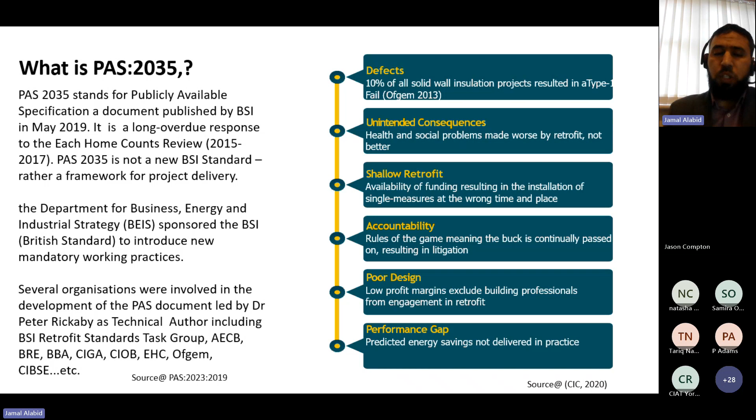And also when it comes to accountability, who is accountable for the unintended consequences and issues caused by retrofitting buildings, and why the design was poor. Is it lack of professionalism? Is it lack of management? So there is a gap, not just in performance, but in understanding the procedure.

So it was really a good idea to get a document that guides people throughout the retrofitting process. I'm trying to define retrofitting as not just renovation or refurbishment, because it's interrelated. These terminologies - renovation, restoration, refurbishment - but the one that refers to improvement of energy and thermal performance of buildings that leads to reduced carbon emissions, that's what we mean by retrofitting. Refurbishment can be just an aesthetical aspect - changing the color, painting, tiles - but that might not lead to improvement of energy or thermal performance.

Of course, environmental performance is counted here. So that's where we distinguish between retrofitting in this context and renovation, restoration. Restoration is probably quite clear - restoring the heritage of the building.

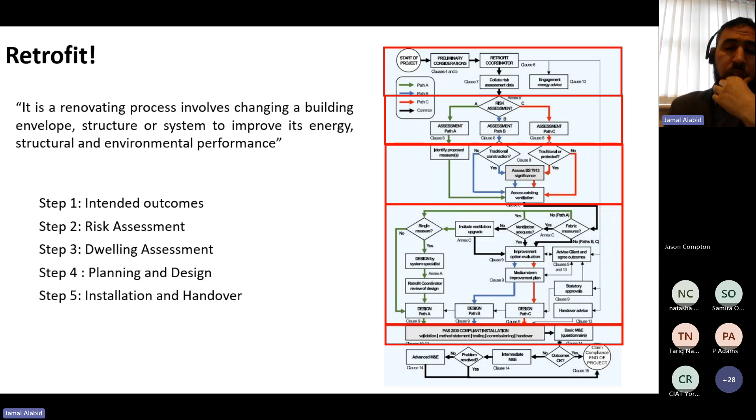That's the same PAS 2035, but a version of 2023. Well, it started last year, but will be released. It really specifies a lot of rules, especially during installation and handover, and also for the retrofit coordinator's intervention and accountability at this stage.

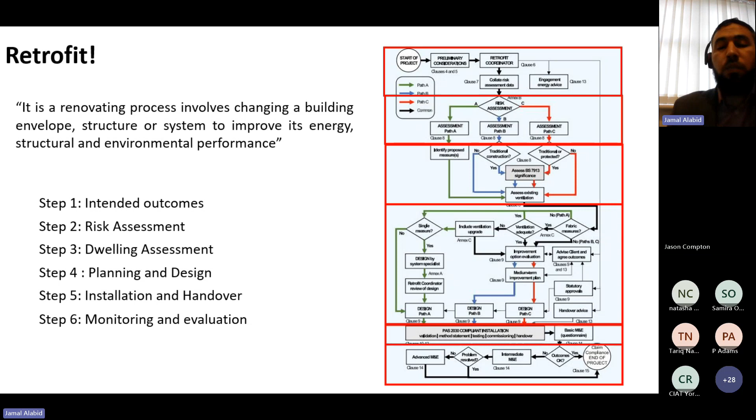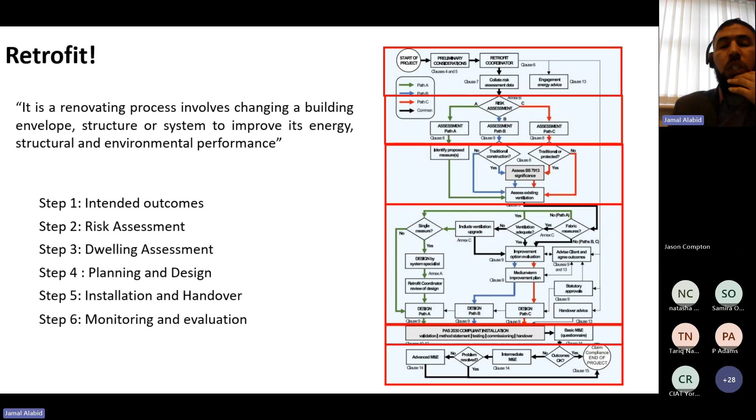This stage, stage 6, is the monitoring and evaluation stage. This will define the time and period the building should be monitored, and who is accountable for this. There are 3 evaluation stages, whether basic or advanced evaluation, and it can go up to 1 year, starting from 3 months to 1 year. Monitoring depends on the certificate produced earlier during installation.

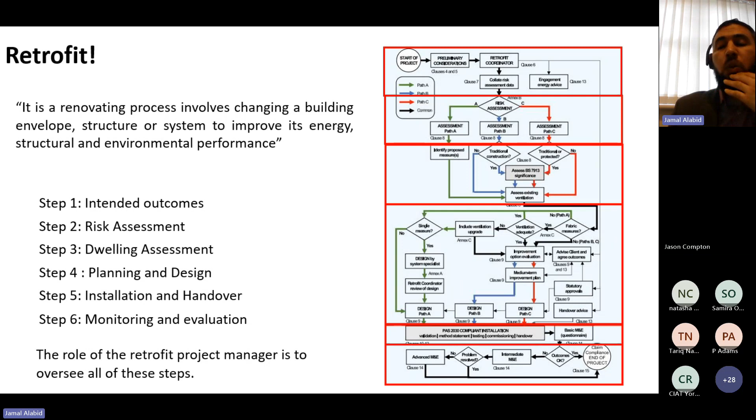So this is probably the final stage, but the retrofit manager or coordinator is the one who needs to look at all these stages and oversee all these steps from A to Z, and the accountability goes to that person. So the new PAS 2035 refers to domestic buildings - a very similar procedure applies for non-domestic buildings, the PAS 2038.

This document defines a few rules within this procedure. It introduced in 2019, including the retrofit advisor, which is a person who has the knowledge to advise on the intended outcomes, understanding the client requirements and the project requirements as well.

There's a limitation and a scope for each project. The retrofit coordinator is a qualified person who has a level 5 diploma in retrofit coordination risk management, and is also registered as a chartered member with bodies like ARB, RICS, CIAT - a few professional bodies that are accepted.

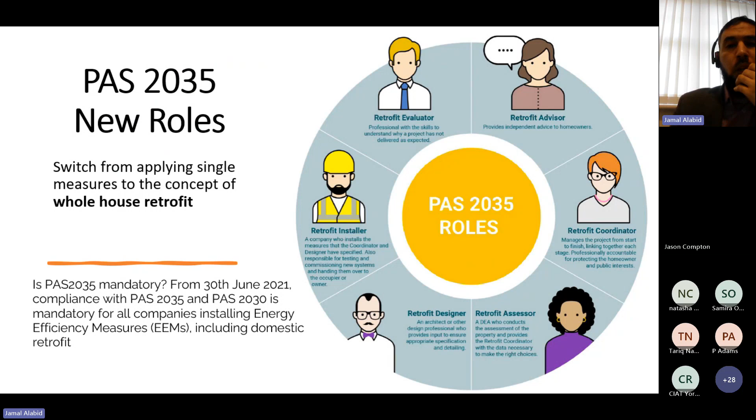Retrofit evaluator comes later in stage 6. It could be the retrofit coordinator, but in some cases it has to be an external retrofit coordinator if the evaluation is an advanced evaluation - it's not allowed for the retrofit coordinator appointed for that project to go for that stage.

This is the rule defined earlier, describing what the person is qualified to do within that process, and the qualification required. If we look at retrofit assessor, for example, someone has a qualification of that level 5 diploma in retrofit coordination.

That would be enough for Path A, risk Path A. But for domestic energy assessor, for Path B and C, they also have to have this level 3 qualification for traditional buildings, the one I referred to earlier, and be registered with an accredited professional body like Elmhurst, Stroma, and a few more - not only these two accredited bodies.

Coordinator again needs someone who has the level 5 diploma as well, but also has experience in the profession, including these rules, and is registered as a qualified member and registered with Trustmark schemes.

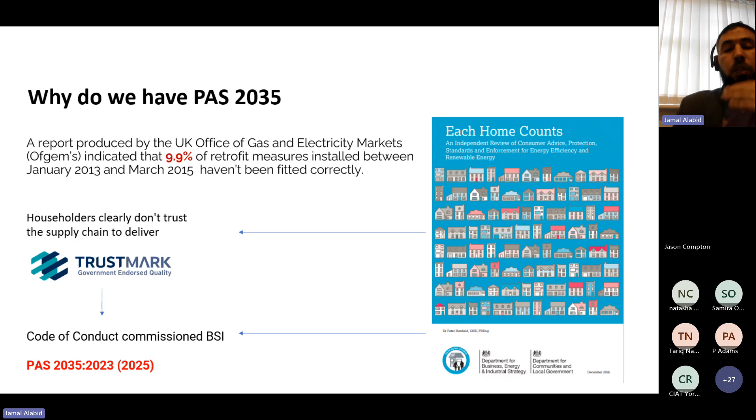Looking at the Preston case specifically, I'm putting a link with these slides about that social housing project and what went wrong exactly. Kate de Selincourt, if I still remember, was the one in charge of this project.

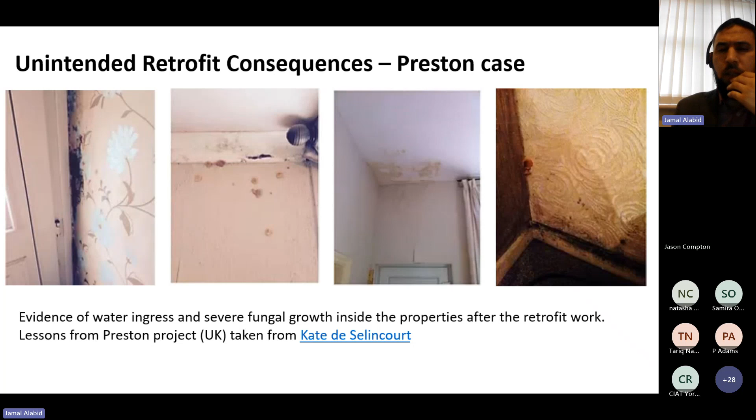So lots of issues. These photos were taken from these houses, and you can see how terrible really the situation is, the mold growth and damp everywhere. And not only that, it led to

just to really retrofit these social housing back. So unintended outcomes can be avoided earlier, not during the design, but during the assessment really, understanding the fabric, and not just the fabric but the way the building is used as well will have a big impact on the health of the building and the occupants, and how many people are using the building,

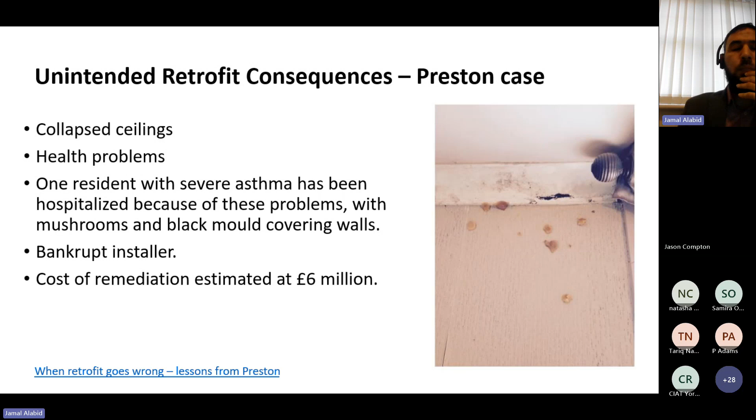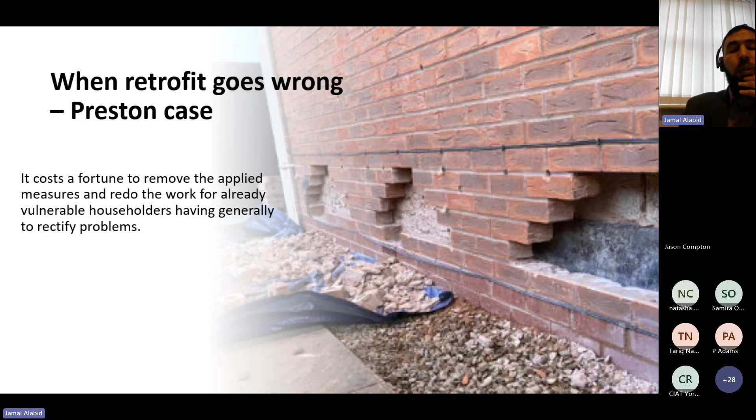and even the type of the building, whether it's social housing, as it has different occupancy patterns. So of course we probably all understand. So the headache and the problem is that if things went wrong, how are you going to get this back? Time consuming, cost, and a lot of disruption as well. So this case study brought really awareness of how retrofitting should be carefully treated and dealt with from the beginning, and understood well from the beginning.

So what are the possible reasons behind this? Not really properly understanding the climate conditions around the building, whether it's heavily exposed to wind or rain, or the conditions around the building. The assessment wasn't really accurate, let's say. The one who did the assessment, clearly a building assessor, energy assessors, but they lack knowledge of older buildings and traditional buildings. So that means them not really understanding the behavior of the fabric,

whether it's breathable or unbreathable, and how to introduce a new material and how that works together. And this is, by the way, when we look at software like WUFI software, it will give you really a good understanding of how materials work together as assembly, and how to avoid especially moisture issues, especially that trapped inside the fabric. Poor design and detailing, and that's of course because of lacking understanding of the building fabric, and

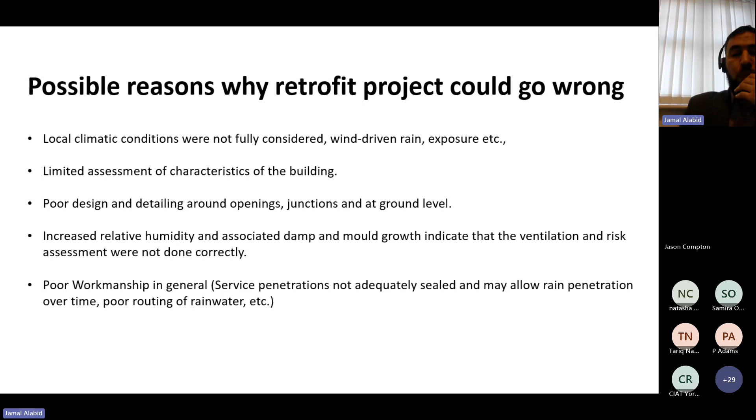Probably installation and workmanship, that during the construction and during the installation of systems maybe was poor, and wasn't adequately sealed and may allow rain penetration. So it could be one of these reasons really. So this is the highest risk, getting your building damp with water content, whether it's penetrating through the fabric, the external walls, from the ground, so this is where water gets trapped there, and can cause a lot of problems, of course.

So earlier we referred to step 1, the compliance document, which is now available really for the public to download free. The first step is to define the intended outcomes. So it's a discussion with the client and identifying a few options here. What the reason is for improving the building, whether the air is, like, the indoor air quality is not sufficient. So probably looking at improving that.

Whether it's a risk of overheating, the building could get overheated during the summer. So identifying a few options will really lead to the next step, where you can plan well and design well according to these intended outcomes, or what the client exactly wanted, simply the measures really, the improvement measures that should be taken, and whether which software probably you're going to use,

whether it's SAP or PHPP, which is the passive house - it's like a tool that they use, but it's not the PHPP, it's the EnerPHit standard. So REB, if I remember well, which is the passive house EnerPHit standard. That's for existing buildings. PHPP is used for new build homes. So it's defining earlier these intended outcomes.

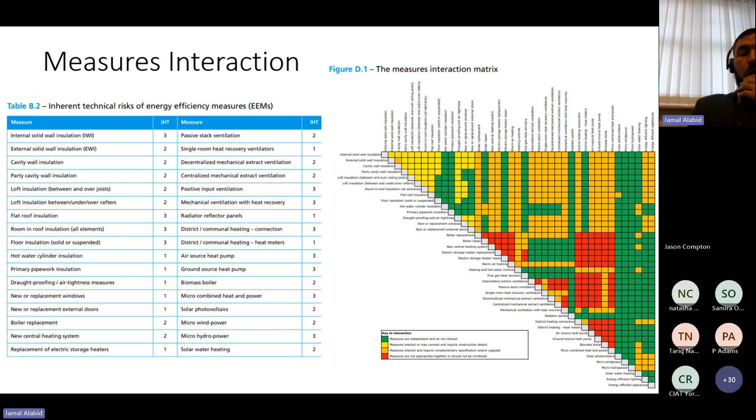The triaging risk is where you put all of these measures, the typology of the building, the size, and then we'll come up with path A, B or C. And that will take you to the next step. So the risk path A, B or C determines the project management approach. This will be decided by the retrofit coordinator.

I think I did explain what path A really is. It's quite straightforward and has less or no risk to the building or the measures to be installed. Path B needs deeper understanding by the assessor, by the professional, by the designer, and a medium-term plan is mandatory, which is referring to a 15 to 20 year plan.

Path C, of course, requires deeper understanding of assessment as well, for example, the airtightness impact on the building, whether it will change the behavior of the fabric. If it's breathable, then that will cause a problem really. Probably all traditional buildings have breathable fabric. So installing airtightness would cause a problem and change the behavior of the fabric.

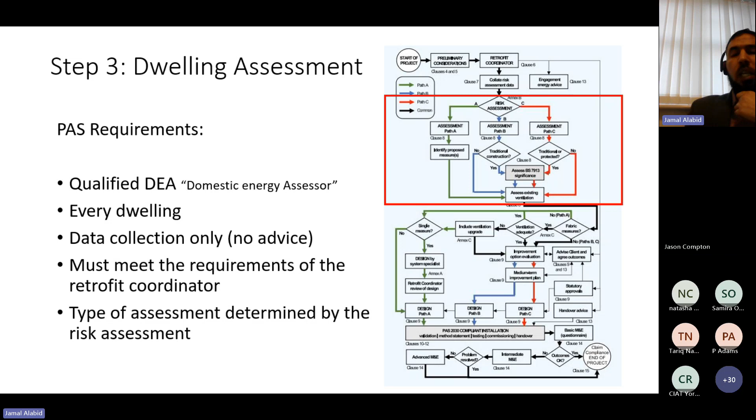The person who carries this out will meet the requirements set by the retrofit coordinator, who should have advised the client and understood the intended outcomes at the earlier, first stage. Then the assessment will follow, with advice from the retrofit coordinator. Again, the risk assessment path will determine the type of assessment, whether it requires a retrofit assessor or just a DEA, path A or B. So the type of path will determine the level of work needed, and whether at each stage a certificate will be provided or not.

Path A is always defined as low risk; not less care needed, but no deep understanding, and probably care of ventilation, because one measure wouldn't have that much impact on the other measures. If you're just changing the boiler or windows, it helps improve thermal and energy performance but will have less impact on the building. But with 3 to 5 measures, there could be a clash or interaction between measures, so we will look at how other measures are impacted.

So in this path, defects and repair are mostly required, to avoid any hidden issues people can't see, using tools like damp meters that measure the moisture content within the elements, whether concrete or timber. So a few things need to be detected earlier, even if one measure is installed. Looking at the existing windows and doors and their performance is also worth looking at, even in path A.

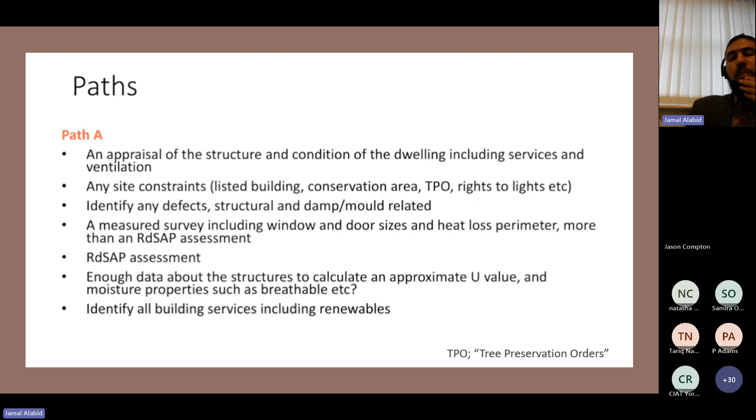Well, this tool or full SAP will calculate the U values, but it's always worth checking the accuracy of this by another method to validate it. So probably these are the main elements that need to be considered in Path A.

Path B: so everything mentioned earlier, but a proper assessment of the occupancy, especially the history, will really determine if there was a high risk of moisture, let's say, trapped somewhere, and how deep this assessment should be.

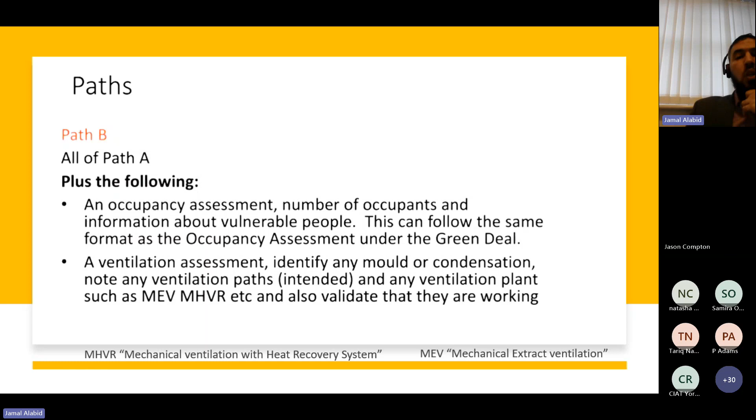And also who is using this building, if they have a special consideration, let's say, and they need to be identified earlier. The existing ventilation and the introduced method would also be identified to avoid any dampness or condensation in the future. So we will look at these two types here: the mechanical ventilation with heat recovery system, or the extract ventilation, which is probably very common in many buildings.

Path C: so everything considered earlier, but here using any elements like air tightness, membrane, or other elements will be really carefully considered and understood, and should be done by someone who has the knowledge and experience to understand the impact and the implication of using air tightness, getting your building sealed.

Surveys as well have to be done by a qualified person who has a level 3 qualification. Really, I advise anyone interested in retrofitting to get this qualification. It's a few weeks, let's say 3-4 weeks maximum, but it really gives you an understanding of different typologies, different ages of buildings, like Edwardian, Georgian, Victorian. And the characteristics and features of the building are important to recognize, but also you can identify whether there is a change happening by understanding the type of the building,

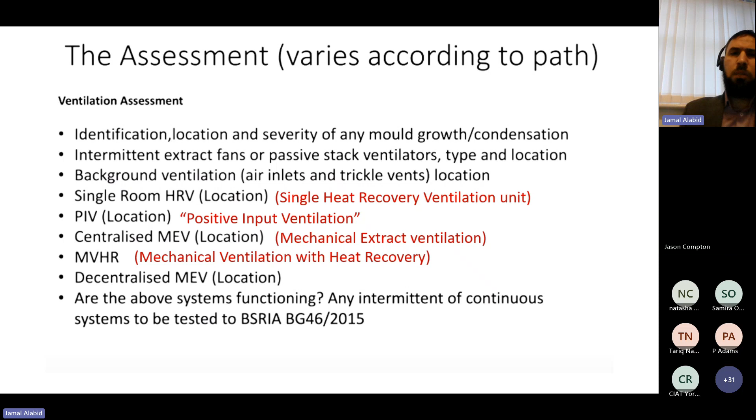Understanding every system, its advantages, its drawbacks, let's say. So it is vital and significant in the process. Understanding how the technology helps is another.

I need to look at my time. I'm not sure if I'm keeping the webinar within 1 hour, and this is my target really. A few slides left, but I'm looking at also this side of technology, but we'll expand on this for part 2 next time.

But it's just worth looking at recommended tools, energy tools, like SAP, the standard assessment procedure. So this uses the methodology of BREDEM, which is the energy assessing tool. The other one is the simplified or reduced SAP, which tends to be for existing buildings, mainly because of the reduced data by default. So it's more or less really input in RdSAP.

So you could really use the full SAP version for existing buildings as well, but the reduced SAP will do the job quicker and easier. PHPP requires more input data, but to me it's worth using this tool, looking at other elements like the costs, the carbon cost effectiveness, and a few other elements that are worth including in your assessment. So this is an assessment tool rather than design really. It will assess your energy improvement and carbon savings as well.

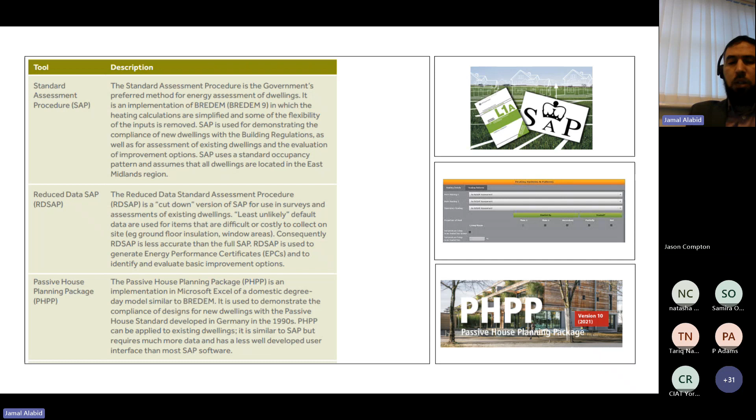Again, as I said, PHPP would be used initially, then you export the data from PHPP to the EnerPHit standard to get the medium term plan, and it's like giving a plan for 20 years, 25 years, the improvements, and gives you options of selecting which measure will have more impact over time and also area, so you can decide where measures or improvements can be installed earlier.

These tools here really help the design stage, I would say, especially WUFI. If I would use WUFI with PHPP, I would use WUFI Passive, just because it's integrated with PHPP and the DesignPH tool. DesignPH is a plugin used in SketchUp, but it's quite useful when you define the thermal bridges, the thermal envelope. Also, you can see the renewable options and solar shading options here. You can define this in a 3D model, and all the thermal elements, including windows, doors, and floors, can be specified using this plugin.

And then you can export this to WUFI Passive to carry out the hygrothermal analysis, where the heat impacts moisture transfer within the fabric, let's say. So it gives you an estimation of the moisture behavior in the fabric over time, 5 years, 10 years. It's quite accurate, really.

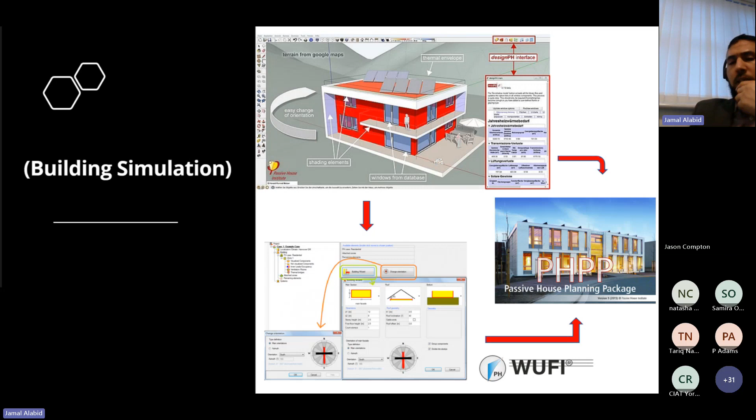Okay, the PHPP tool is the passive house design tool. And as I said, we will look at this probably in more detail in part 2. Dwelling assessment, stage 3. I think we mentioned this, didn't we? Is that a mistake?

Retrofit qualification and training. I would really recommend having a retrofit qualification, starting with level 2, level 3 and level 4, and also level 5 for retrofit coordination.

It's worth really looking at this. I will put a link to some of the funded courses, including this Level 4 award in domestic retrofit assessment, and also Level 3, which is fully funded as well.

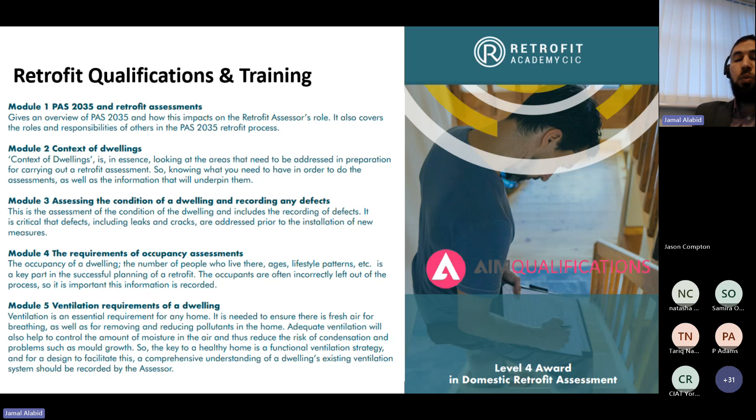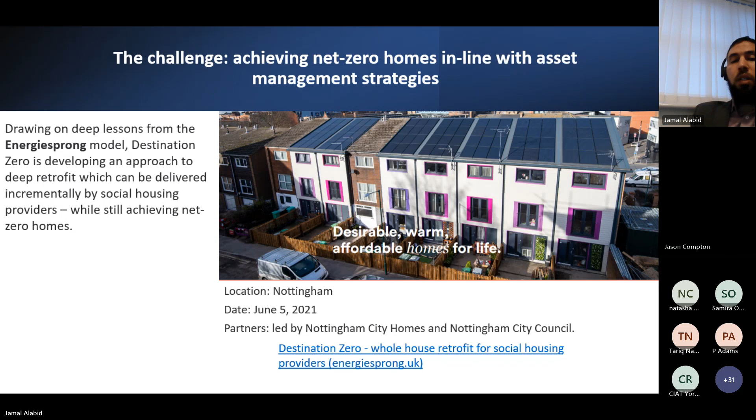I'm not going to talk that much about this, but this social housing in Nottingham was a good case to see the management strategy that the Energiesprong model applied there, and the challenges and limitations. One challenge is clearly where one of the owners decided not to agree to retrofit the house, which has an implication on the other improved houses, since everything is linked - roof, party walls - so this is a challenge. But there were still very good outcomes from this project.

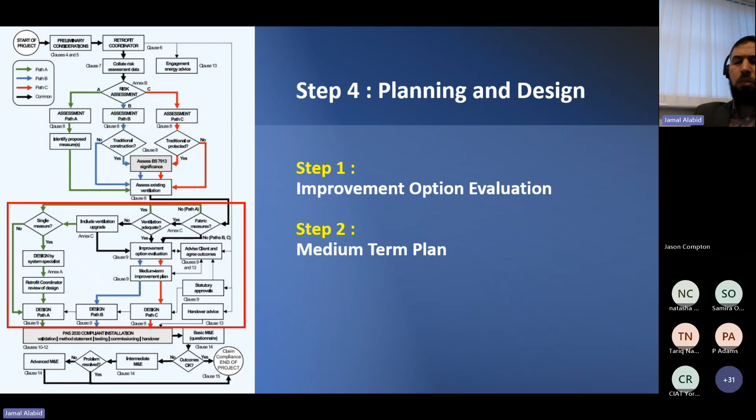Planning and design will depend on the previous stages again, so the accuracy of the assessment and the intended outcomes earlier. You can have a medium-term plan. This is mandatory for Paths B and C, but not mandatory for A, because it will have less risk and less impact on the thermal and moisture behavior of the building.

Within the compliance document, you will see options like this - the evaluation options - and you can see both option 1 and 2 at the same time. Once you generate the assessment, the evaluation will give you data and results looking at not just energy savings, but also other elements like carbon, cost effectiveness, the cost of operational energy, and payback period.

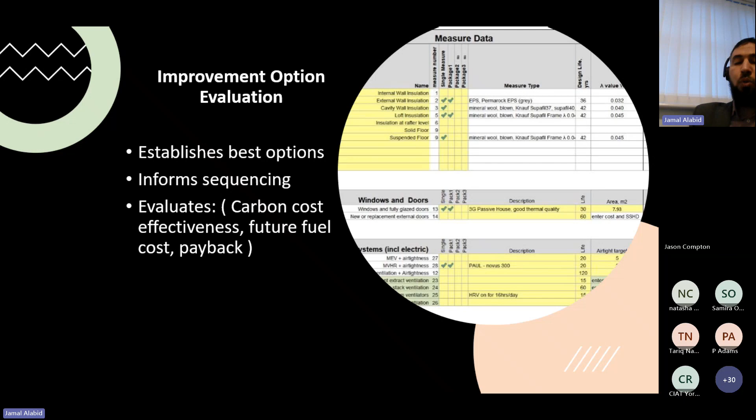The payback period shows how many years it will take. We'll have a few extra columns that show your results and their implications. Payback period is probably not the best method to use, but it gives you a simple calculation of how many years that will take.

Is it one hour, Jamal, Matthew? Yes, we've gone over slightly actually. How are you doing on slides? It's probably 2 or 3 more slides. Okay, I'll let you finish them. We've got to finish in a few minutes, with a few questions - 3 or 4 minutes. I would say not more than 3 minutes.

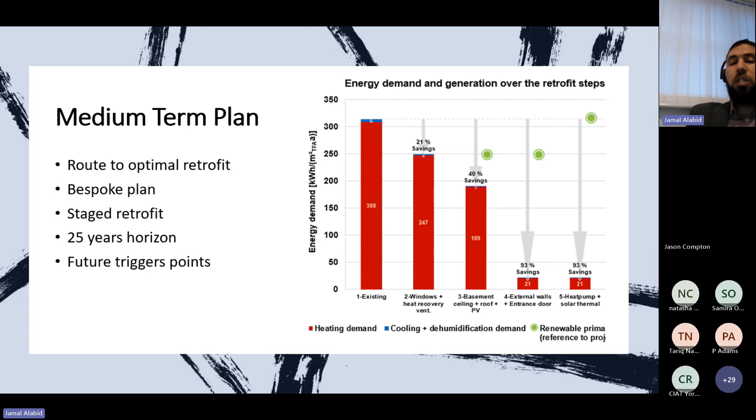Installation, of course, depends on the path risk. You need a certified installer, and whether certification is required will be determined by the risk path earlier.

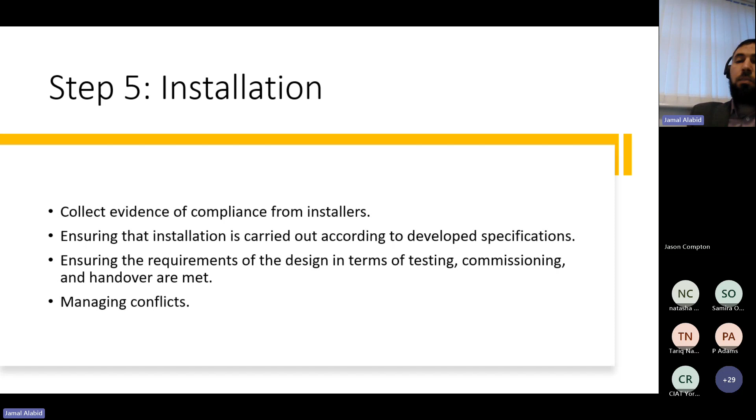Monitoring, as I said, is an evaluation carried out by an evaluator, who could be the retrofit coordinator, but in some cases it will not be allowed for the same retrofit coordinator or manager to carry out the evaluation if the risk is high or the evaluation is advanced.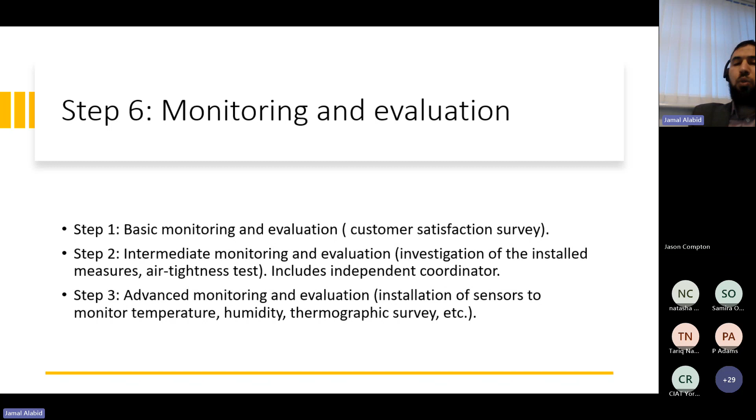As a summary, I'm trying to summarize the webinar. The retrofit coordinator role here is crucial, really critical in the process, and the more experienced that person is in retrofit projects, the more it will help make the retrofitting process smooth.

I would say we have already covered the steps, intended outcomes, to the evaluation stage. Various actors are involved in retrofitting projects, so we looked at the roles and at which stage, according to which path exactly. We need to learn from our mistakes - that's absolutely acceptable, but we shouldn't repeat the same mistake again and again.

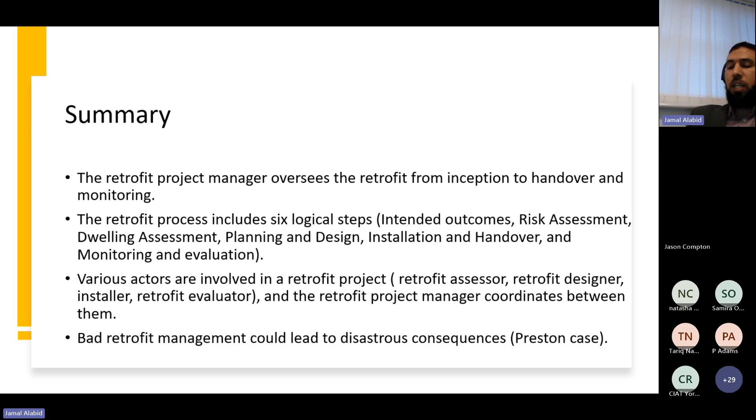It's worth looking at bad experience more than good experience to get lessons. I will stop here. I will provide links to a few of these available fully funded or partly funded training courses, which should be found with the slides that will be shared later.